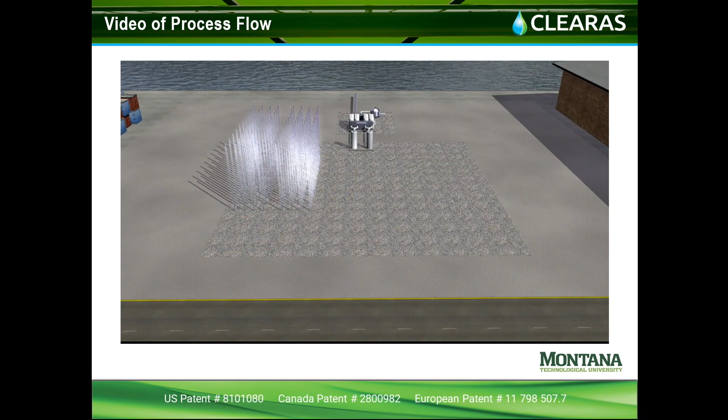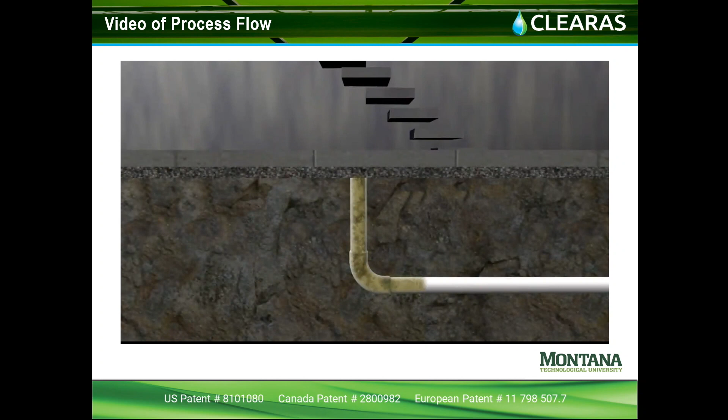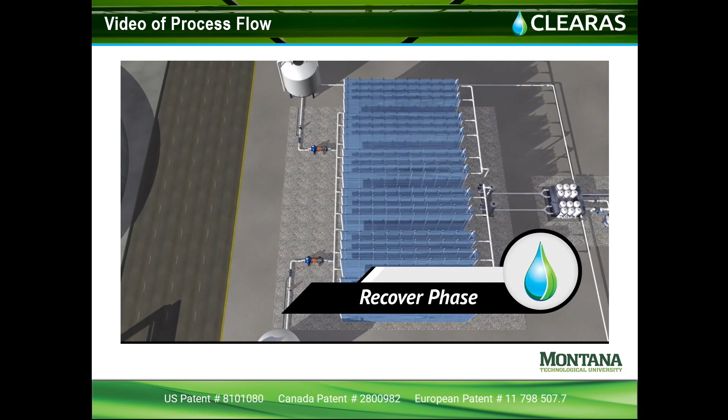As a chemical-free and biologically based wastewater treatment solution, the Clearas Advanced Biological Nutrient Recovery System, otherwise known as ABNR, leverages a zero-waste process to effectively and sustainably achieve ultra-low-level nutrient results. It is highly modular and scalable and can bolt on to existing water treatment infrastructure. The patented ABNR system applies traditional biological wastewater treatment principles. The result of the process is best-in-class water quality. ABNR contains four core phases: the mix phase, the recover phase, the separation phase, and the harvest phase.

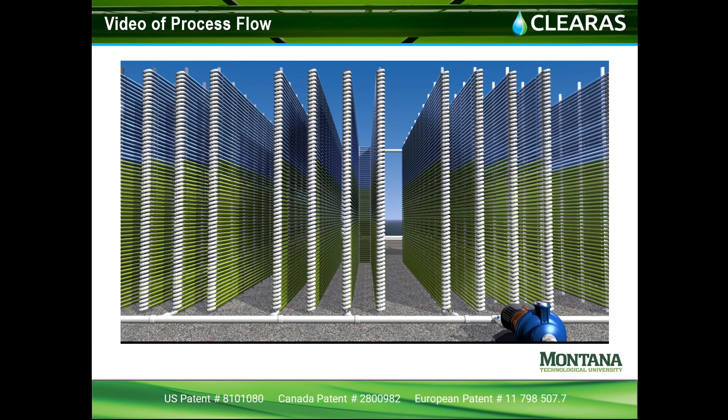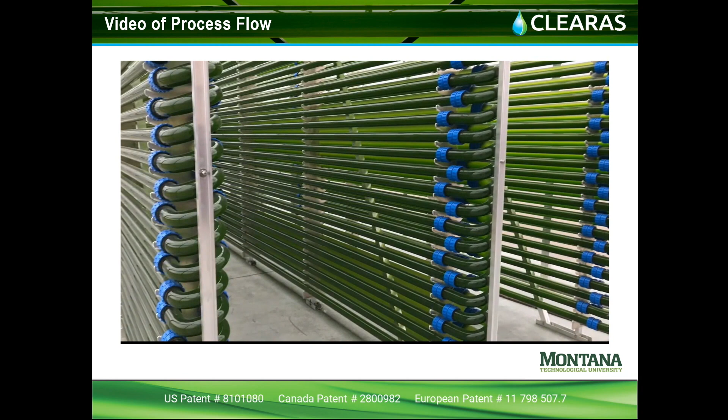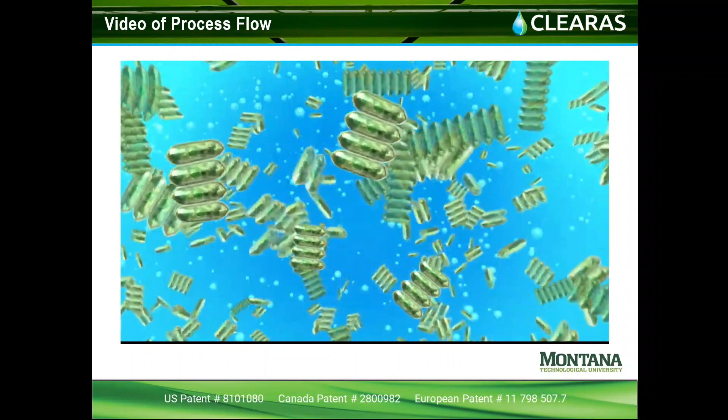In the mix phase, contaminated wastewater and CO2 are mixed with a blend of algae and other biological organisms to create a biodiverse mixture flow. In the recover phase, the mixture flow leaves the blend tank and enters our vertical pond system. The greenhouse structure and light source provide light for year-round, 24/7 nutrient recovery. The vertical pond system optimizes biological activity and photosynthesis. Inside, the algae metabolize nitrogen, phosphorus, CO2, and other unwanted contaminants, and rapidly divide. The dense algae culture takes over and biologically cleans the water, releasing oxygen. The vertical pond system is self-cleaning and runs continuously with zero waste.

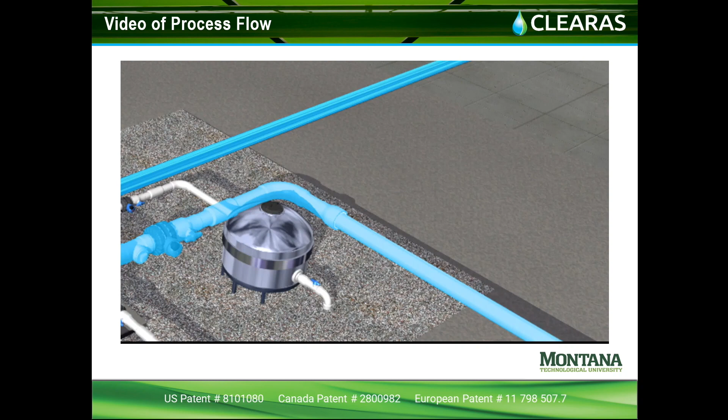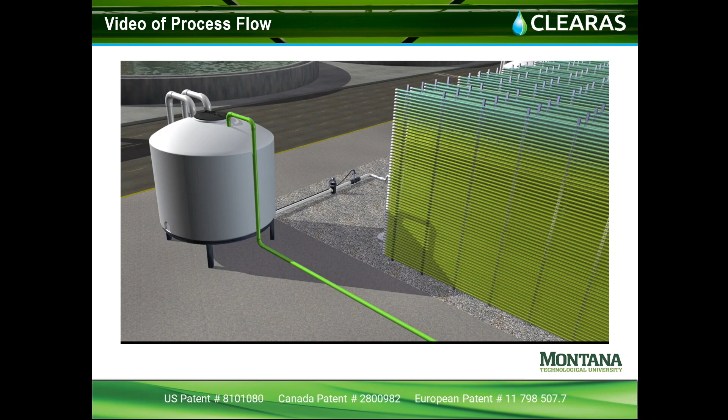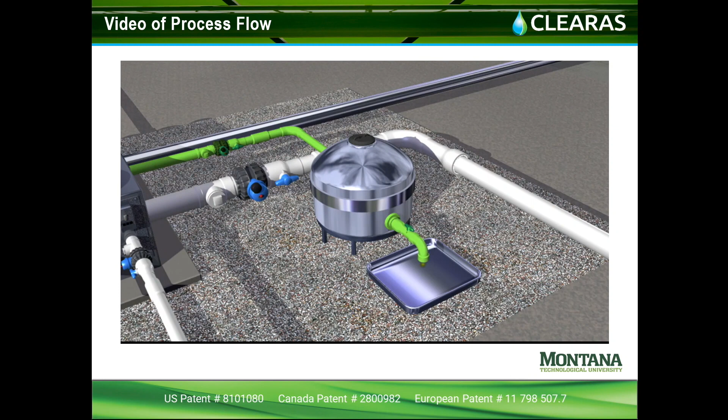In the separation phase, advanced ultrafiltration separates the mixture flow into two different streams: the clean water stream and the recycle stream. The recycle stream sends healthy return activated algae and other biological organisms to receive new wastewater entering the blend tank, starting the treatment cycle over again. In the harvest phase, excess waste activated algae is removed from the treatment process. This algae is then leveraged in a wide range of downstream markets, which provide a unique opportunity for cost recovery.

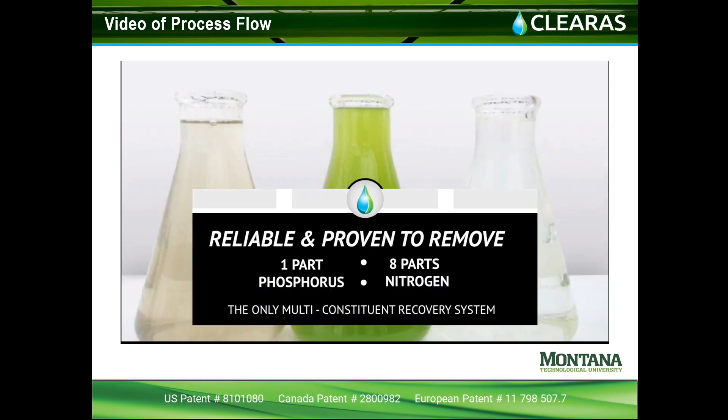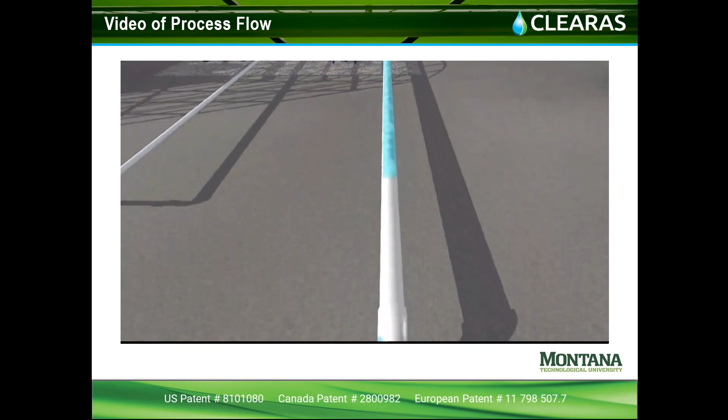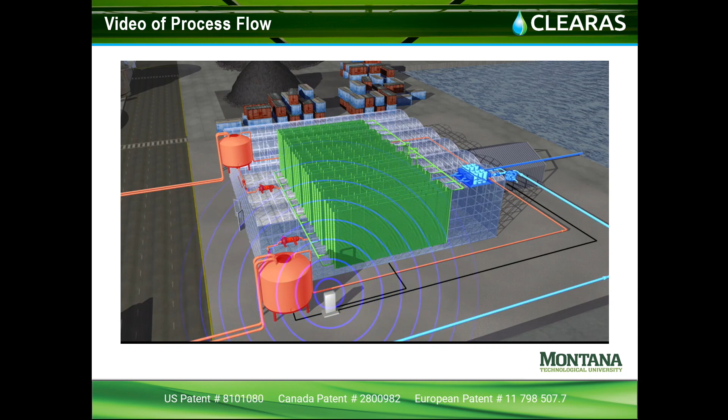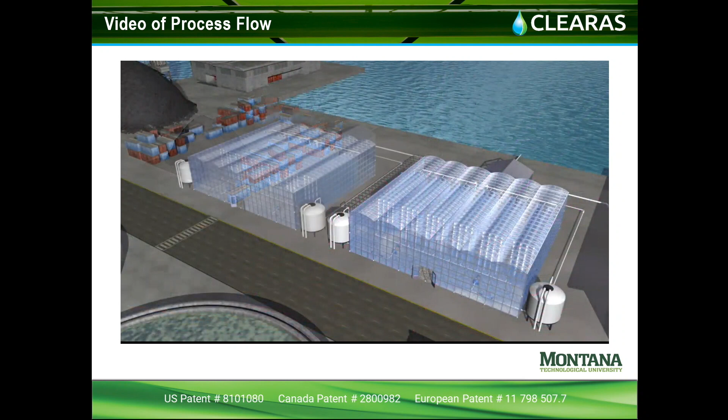The ABNR treatment process has been shown to dramatically reduce phosphorus, nitrogen, and other constituents. The clean water stream is now free of harmful levels of contaminants. It can be safely discharged or sent back for reuse in upstream plant operations. ABNR cleans water sustainably and is administered by a state-of-the-art information management system, allowing for low-cost monitoring and accessibility from anywhere. The automated controls regulate the relationship between the biology and the mechanical processes to maximize the treatment impact. ABNR is highly modular, scalable, and flexible to meet a variety of water quality needs. Unlike traditional mechanical and chemical technologies, the system produces zero waste and has a competitive total cost of ownership.

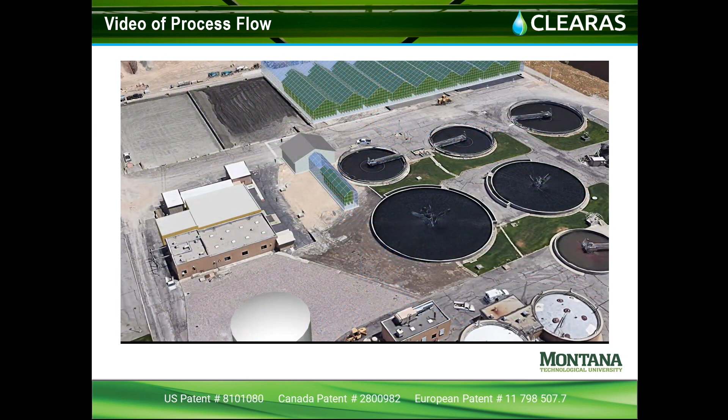Clearas Water Recovery, simple, chemical-free nutrient recovery.

I think you have to click on the slide.

Our flagship and first fully operational full-scale project is in northwest Wisconsin. This plant has a flow rate of 0.57 million gallons per day and an average incoming phosphorus level of 4 milligrams per liter. The EcoRecover system can treat this down to 0.04 milligrams per liter at exit. With the dryer system, this is able to produce about 90 to 140 kilograms of dry algae biomass per day, meaning we recycle about 900 pounds of carbon dioxide per day, or 400 kilograms.